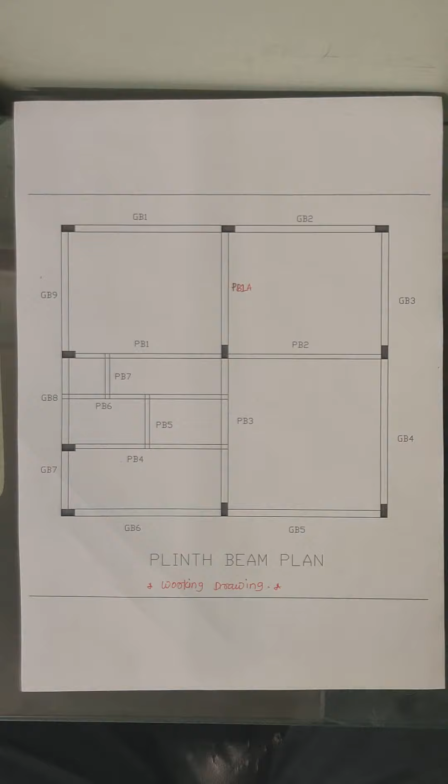In this video we are going to learn how to start or prepare the working drawing of plinth beam. In the previous video we have seen how to draw the foundation plan and centerline plan. First let us discuss the centerline plan that we prepared previously.

In this plan we prepared the center to center distance between columns by referring to one starting point called the face. All dimensions of the columns are given, their orientations are given. On this basis, the centerline plan is prepared.

After the centerline plan, it is necessary to know the different reinforcement details of the column. Sizes are known but reinforcement details are unknown, and excavation of the footing is also unknown. So before going to the plinth beam, it is necessary for all to know about the details of footing - footing size, footing depth, excavation depth, size of column, and reinforcement details of footing and column. All these important elements need to be known. Let us see them one by one.

If you see the load on column - first, column numbers 1, 2, 3 are all external columns having a load of one beam, two beams. So column numbers 1, 2, 3 are having the load of two beams, and the wall constructed over it also adds a load of slab.

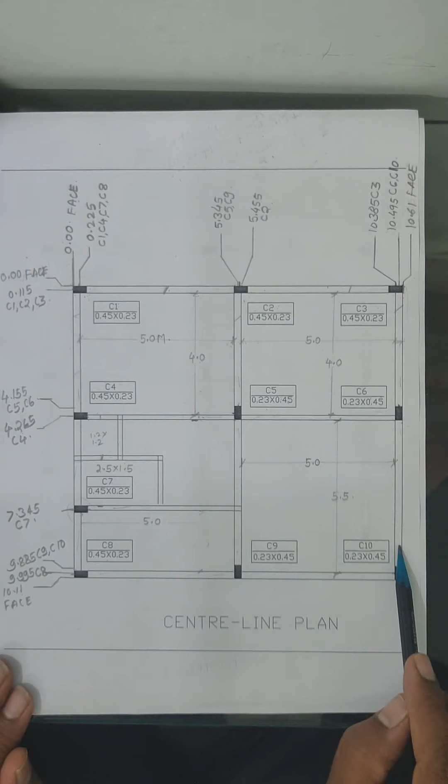Column number 7 is having regular load, or we can say it also has the load of three beams - beam 1, 2, 3. It is one of the bigger columns, having more load. Column number 8 has a load of two beams. Column number 9 has load of beams 1, 2 and 3. Column number 10 also has load of beam number 1, beam number 2, etc.

So we will split the columns into two parts - columns having less load, and columns having more load. According to the loading criteria, after applying all the design criteria, which you will study in detail...

...design of beams, RCC design. But at the second year level you should know only the different reinforcement details. How to design it is another part.

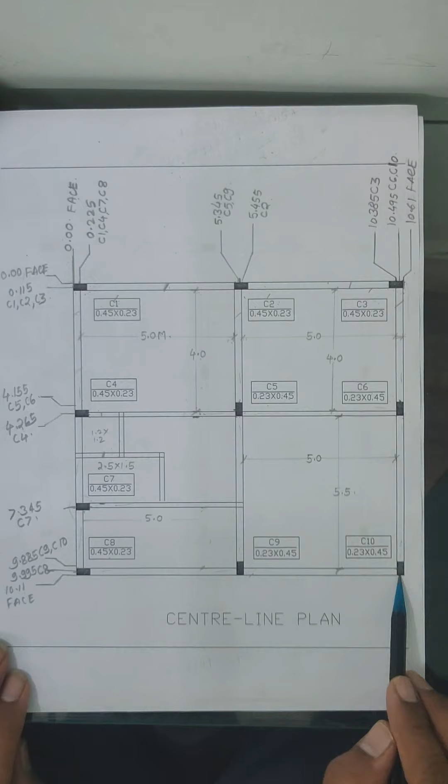In this video I will tell you how to give dimensions, how to give reinforcement details, and how to fix the number of bars. We will split the 10 columns into two parts: one group contains column numbers 1, 2, 3, 4 and 8. The second group contains columns 5, 6, 7, 9 and 10, since these have more load compared to the others.

Let us see the schedule. This type of schedule you have to prepare - you can call it the reinforcement schedule.

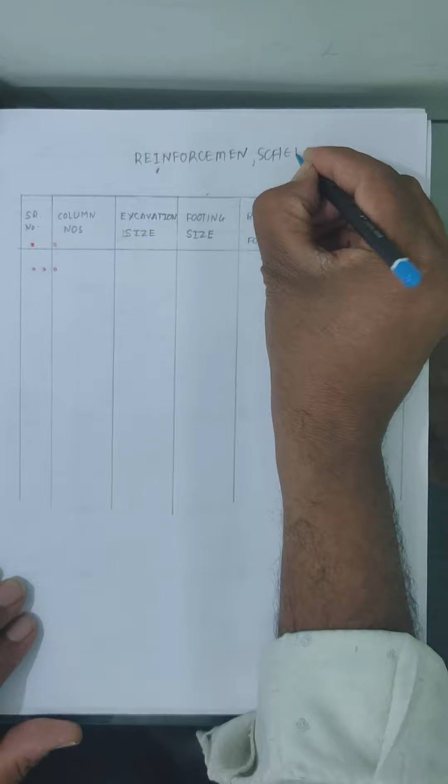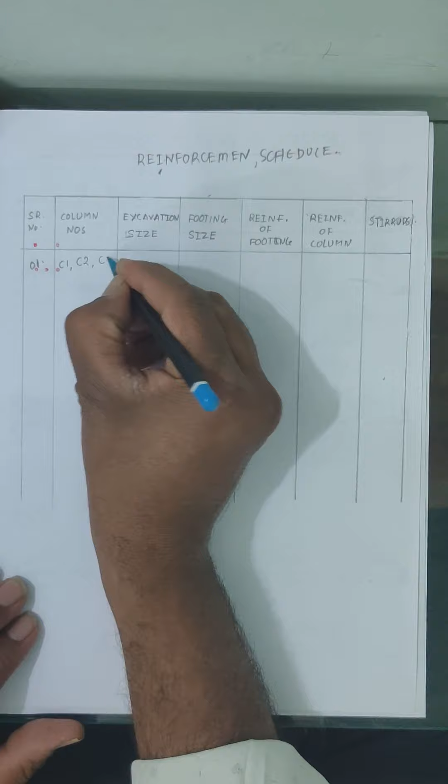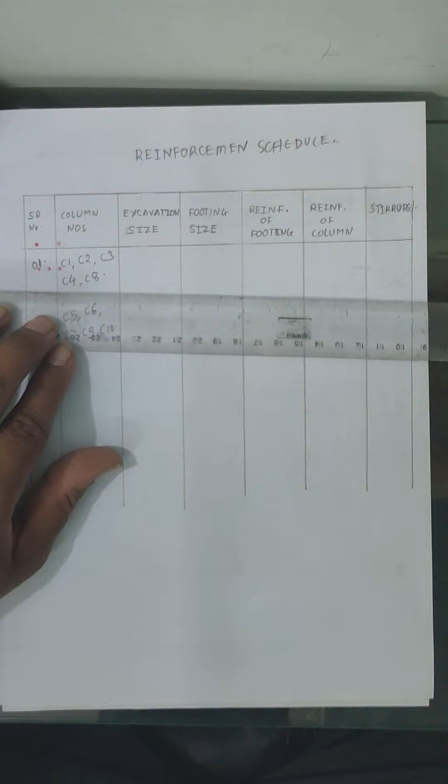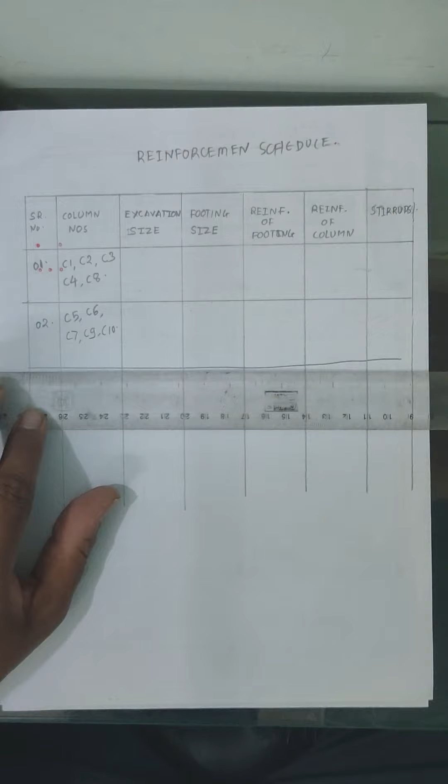Serial number 1 includes column number 1, column number 2, column number 3, column number 4, and column number 8 in one group. Serial number 2 includes column number 5, column number 6, column number 7, column number 9 and column number 10 in the second group. In this way the columns are split into two groups.

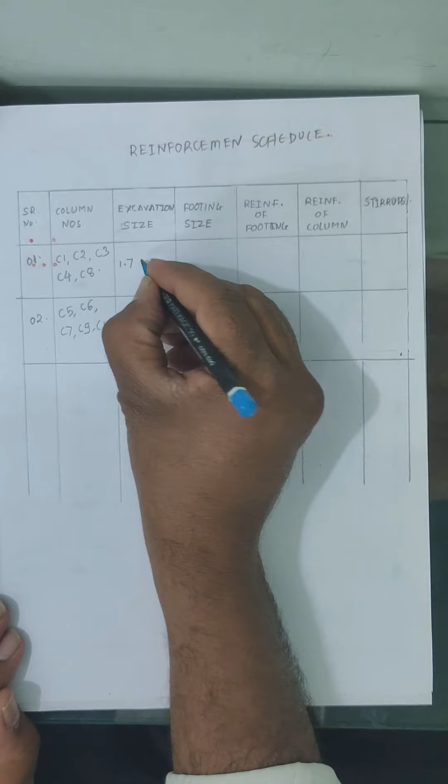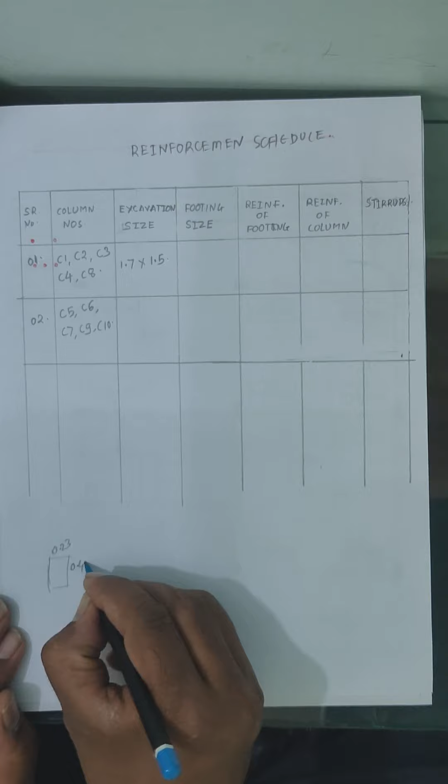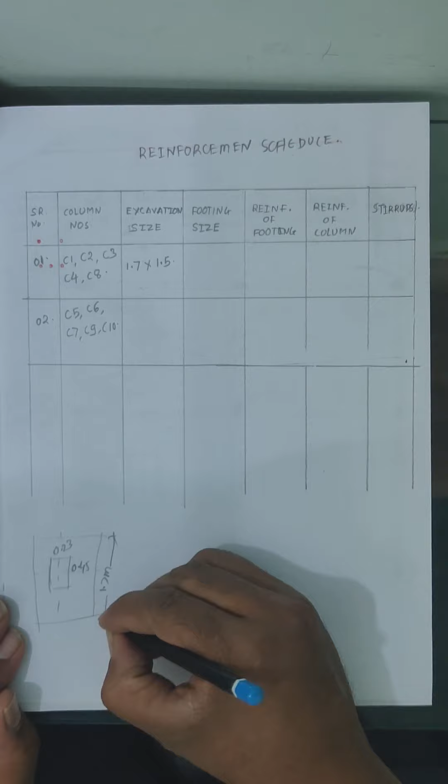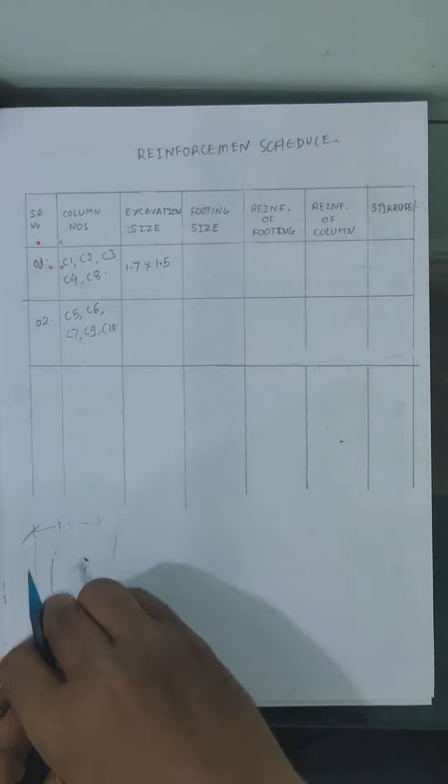First, the excavation size. The excavation size should be like this: 1.7 meter along its length and 1.5 meter along its width. If the size of the column is 0.23 by 0.45, then the excavation detail should be 1.7 meter along the length and 1.5 meter along the width. Likewise, you have to prepare the excavation size of the footing, or excavation trench, in which the footing will be cast.

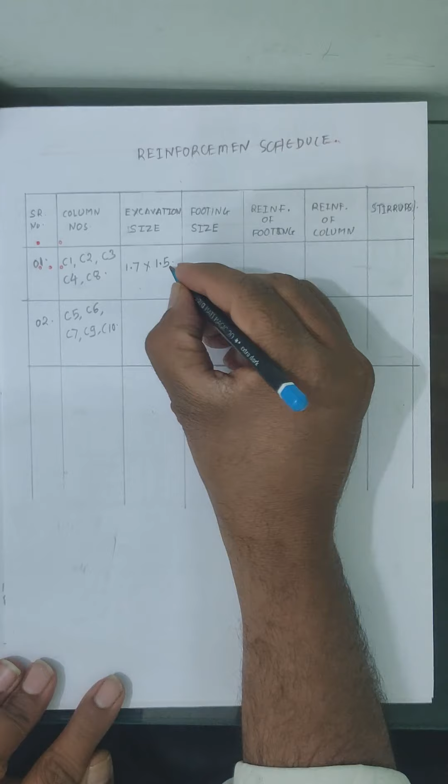Now the footing size should be less than the excavation size - 1.5 meter by 1.3 meter. Now let us look at the reinforcement of footing, the reinforcement detail.

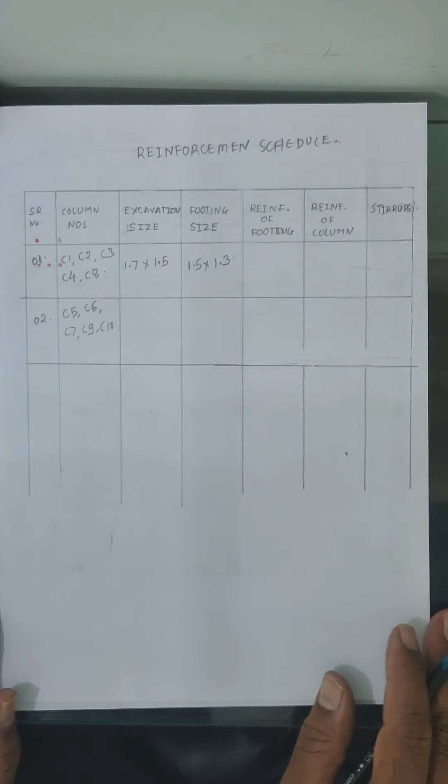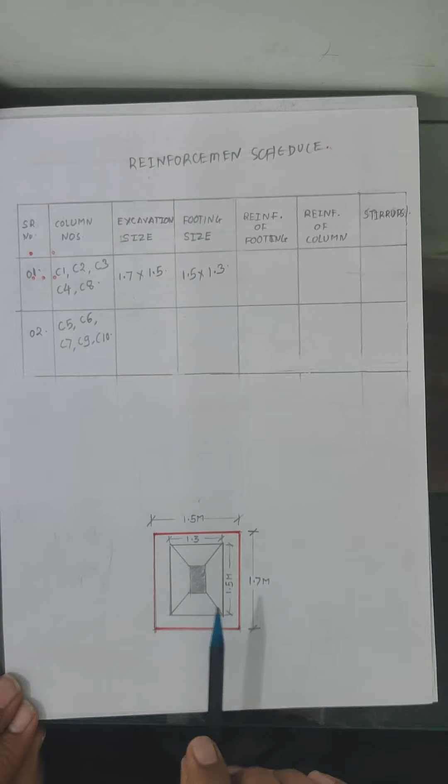With the help of this diagram you will understand how to draw excavation details and footing size. This red marked area is the excavation size of footing.

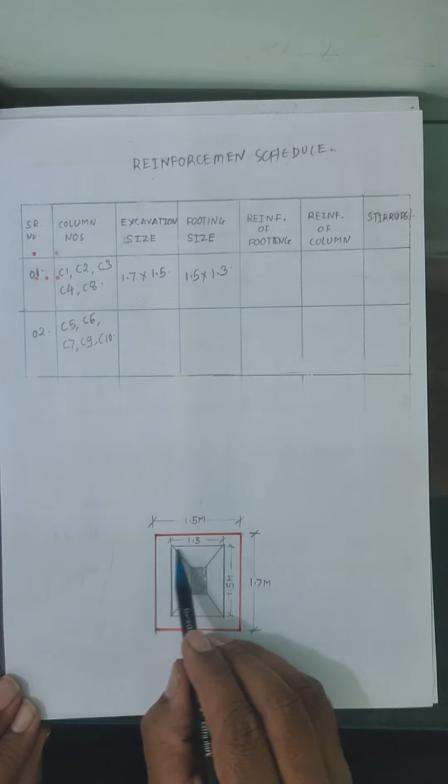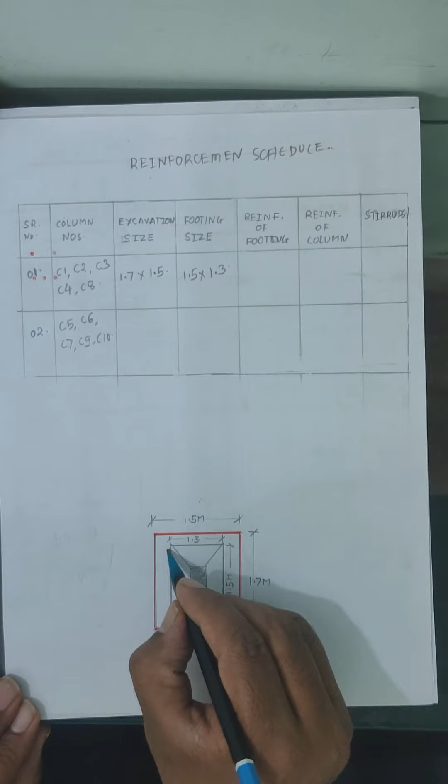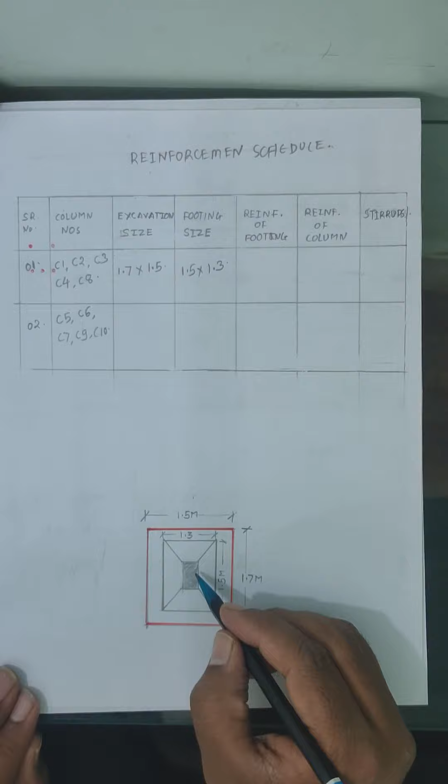For column numbers 1, 2, 3, 4 and 8, the excavation size is 1.7 meter along the length and 1.5 meter along the width. The footing size for this internal block is 1.5 meter along the length and 1.3 meter along the width, with 0.1 meter, that is 100 mm, as marginal distances necessary for reinforcement and formwork. So footing size is 1.5 meter by 1.3 meter.

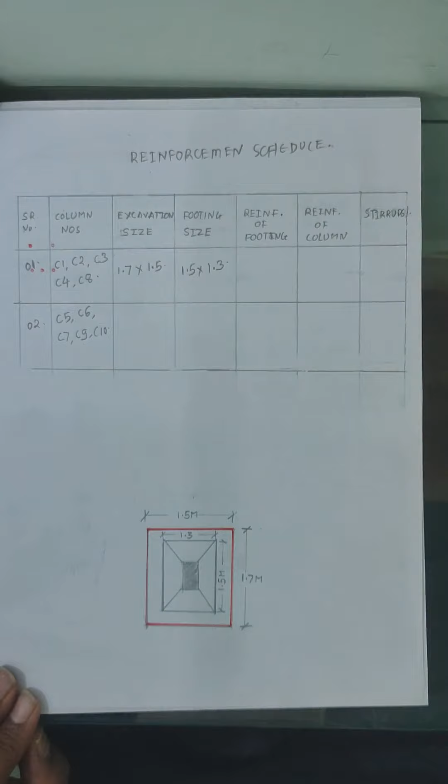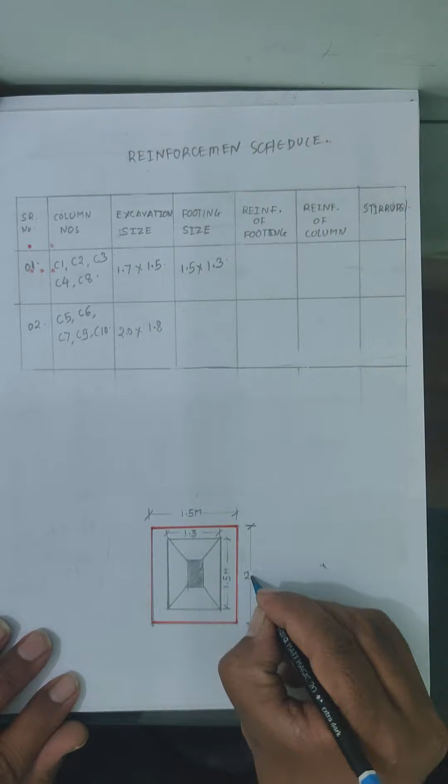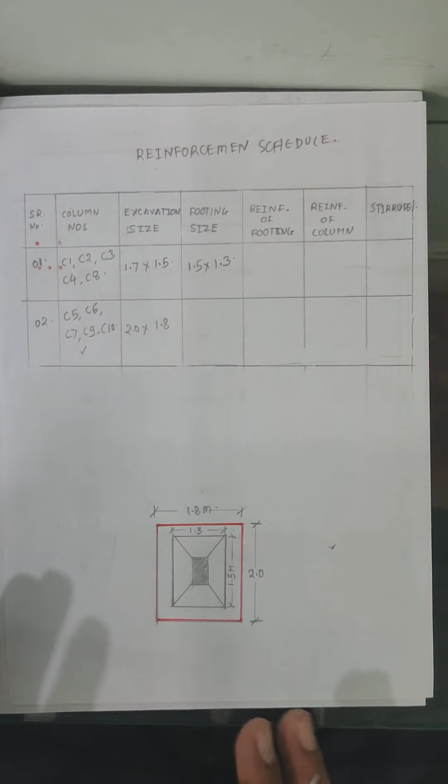For the second group, column numbers 5, 6, 7, 9 and 10, the excavation size is 2 meter by 1.8 meter. Along the length excavation size is changed to 2 meter, and along the width 1.8 meter, because this group has columns that are more loaded, therefore more area of footing should be provided.

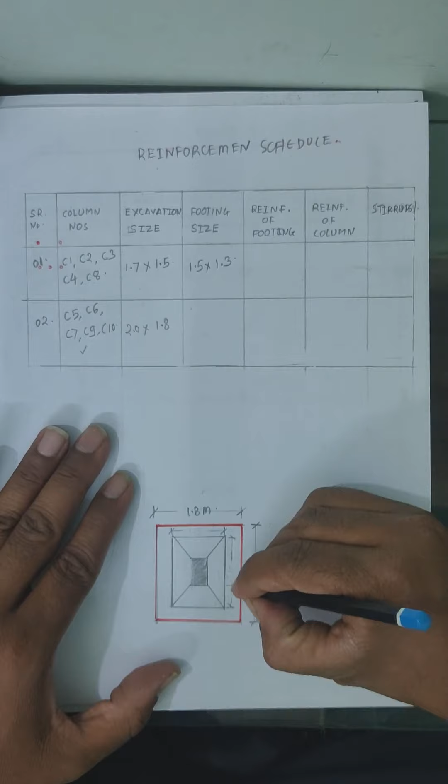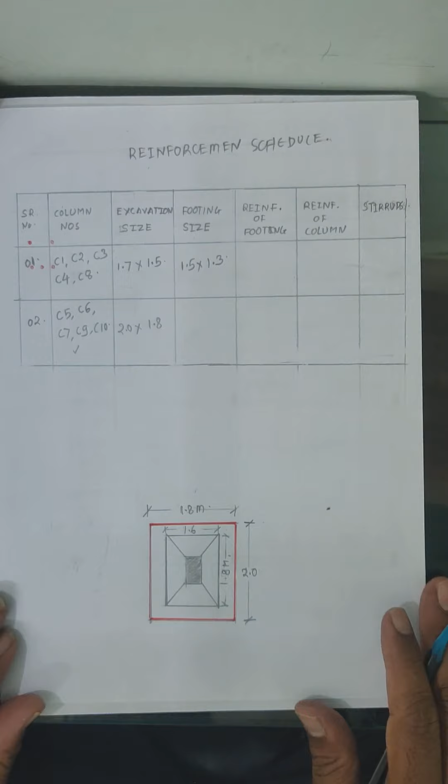So the footing size should be changed along the length and along the width. It should be 1.8 meter along the length and 1.6 meter along the width. So in this way, excavation size and footing size for the two groups of columns are given.

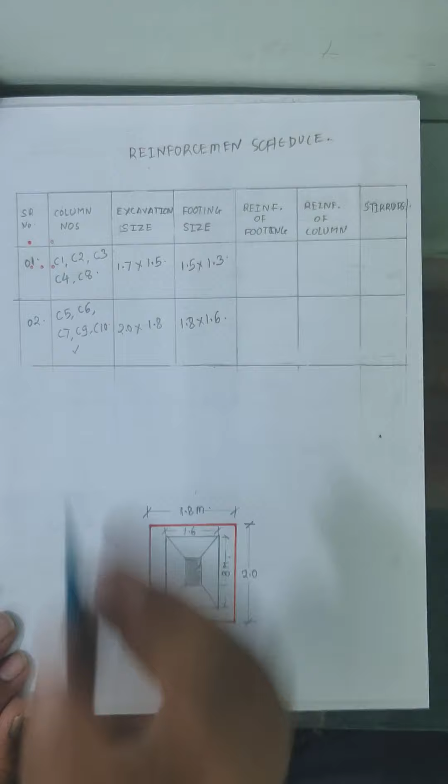Now reinforcement details of footing. How the reinforcement details are given, let us see. With the help of figure number 2 you will understand reinforcement details of footing and column. In figure number 2, reinforcement details of footing are mentioned.

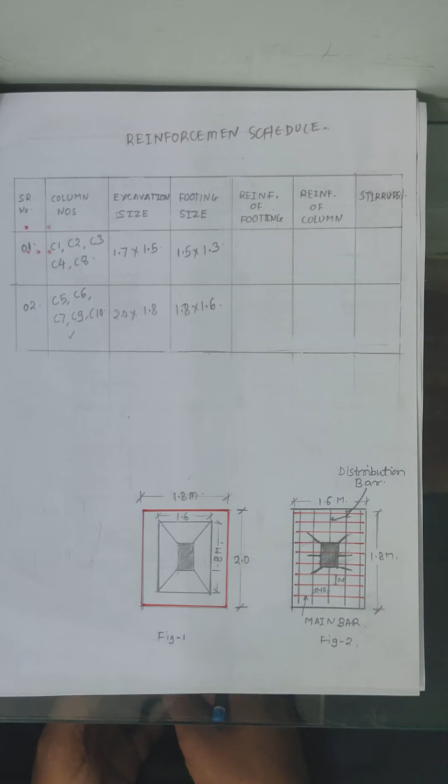We can see the bars in red color and bars in black color. Bars in red color are main bars along the width. Main bars are provided along the width, the short side, and for the long side, distribution bars are there. So main bar and distribution bar.

There is spacing mentioned between the main bars. The center to center distance between two main bars is 0.1 meter, that is 100 mm, and 150 mm distance between two distribution bars.

So main bars are provided along the width, that is the shorter span, and the bars provided along the length for the longer span are called distribution bars. The spacing between two distribution bars is 150 mm, that is 0.15 meter, and the distance between two main bars is 0.1 meter, that is 100 mm.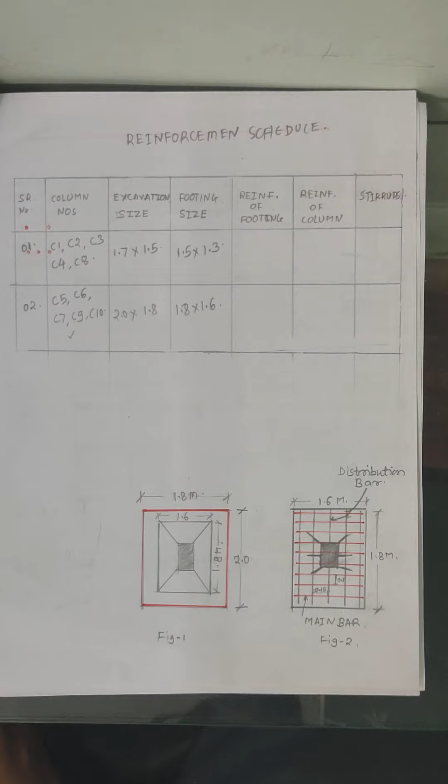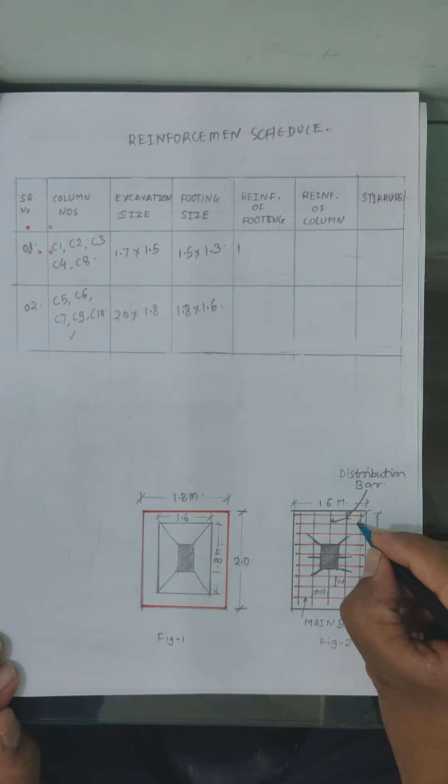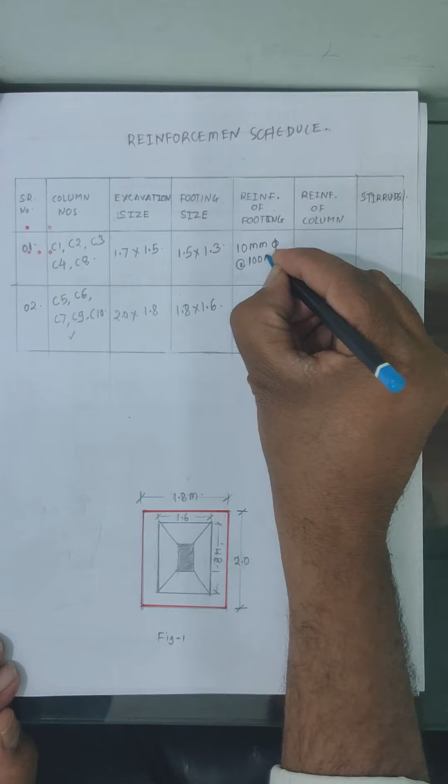So in this way the reinforcement of footing is mentioned. You can write down reinforcement of footing here: mainly 10 mm diameter bars are used for both the distribution bar and the main bar. So reinforcement of footing, 10 mm distribution bar and main bar are provided along the 100 mm center to center for main bar.

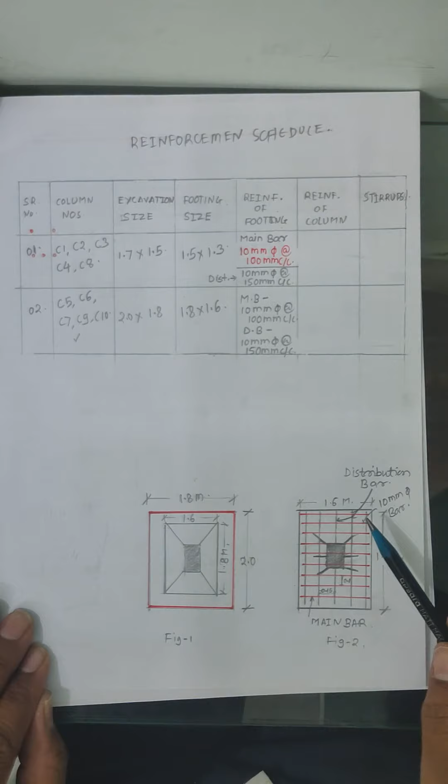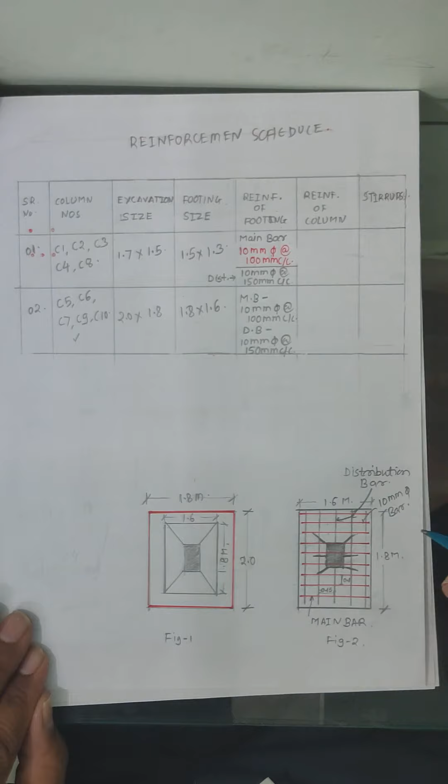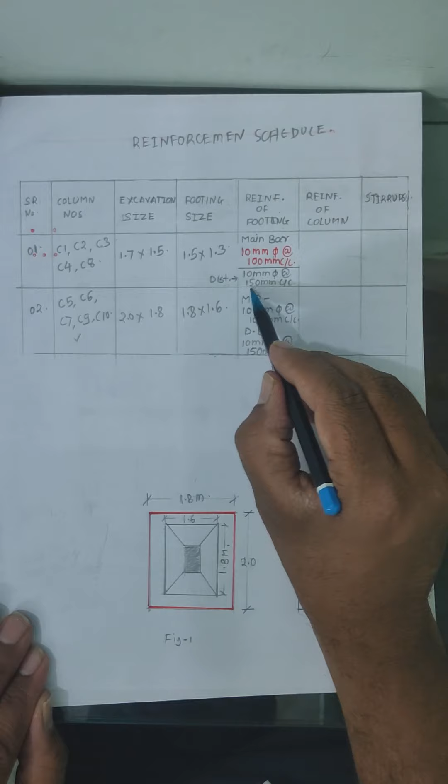So main bar is provided along the shorter span, 10 mm diameter at 100 mm center to center, that is the distance between two main bars is 100 mm. Distribution steel, shown in black color, 10 mm diameter bars, are provided at 150 mm center to center, that is the distance between two distribution bars is 150 mm. Same details are given to the second group also.

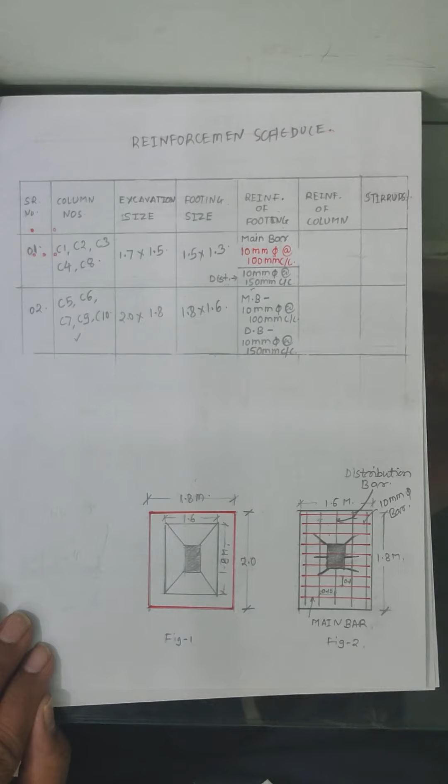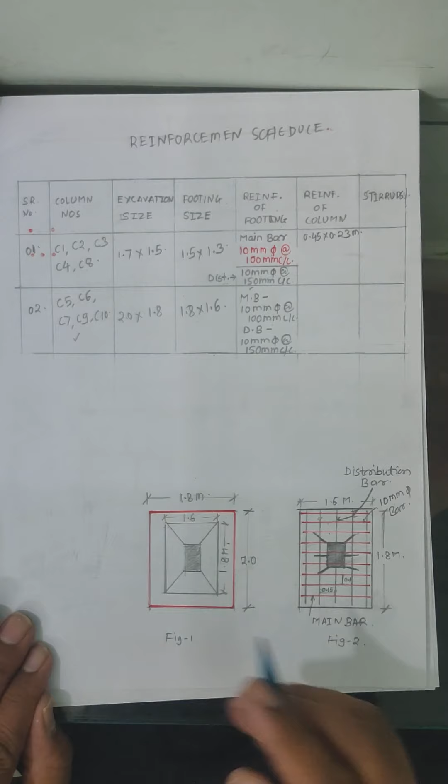Now the reinforcement of column. All of you know the size of all columns are the same, that is 0.45 by 0.23 meter. But there are two types of columns: one is lightly loaded and second is heavily loaded.

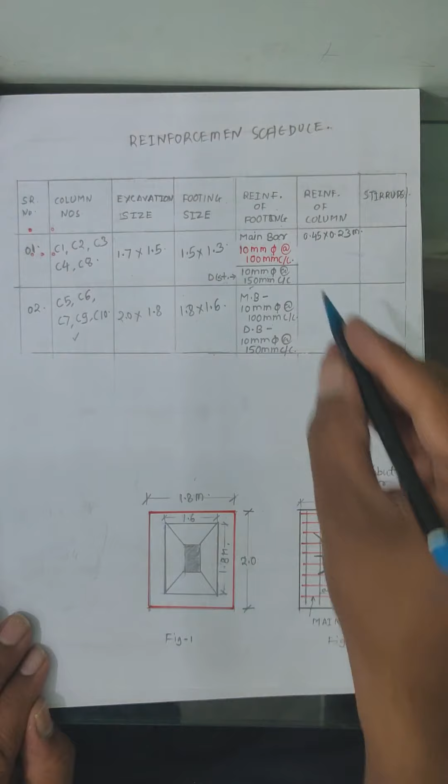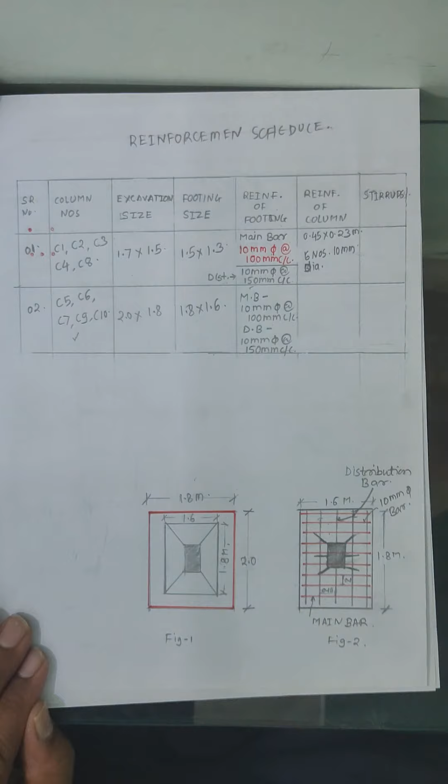For the lightly loaded column, reinforcement details are different. 6 numbers of 10 mm diameter bars are provided. And for the heavily loaded column, 8 numbers of 10 mm diameter bars are provided.

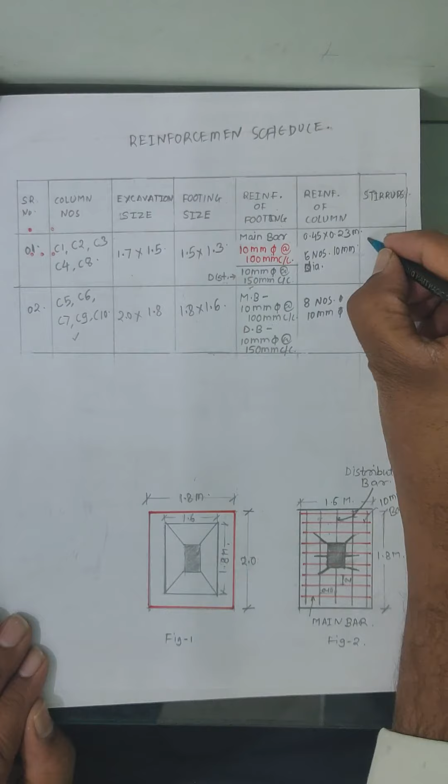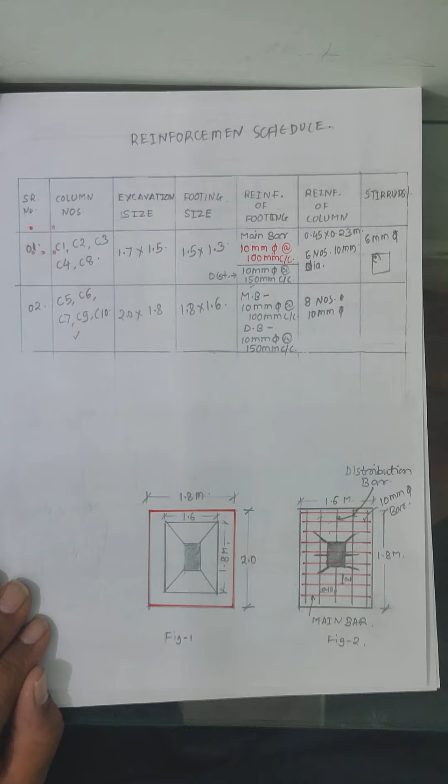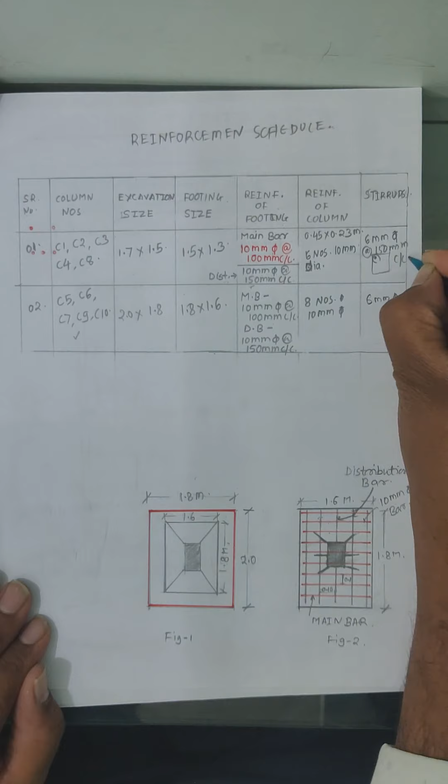For both groups, 6 mm diameter stirrups are used. All of you know a stirrup is generally used to bind the bars of a column. It should be in rectangular shape if the column is rectangular, like this. This is the stirrup, 6 mm diameter, provided at 150 mm center to center, that is the distance between two stirrups is 150 mm, that is 0.15 meter center to center.

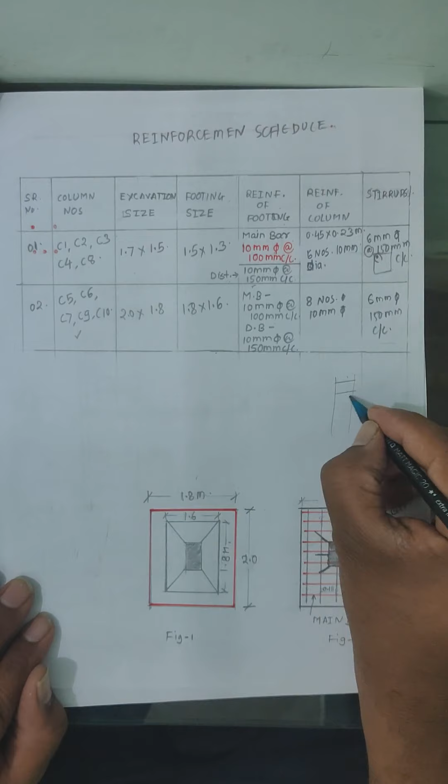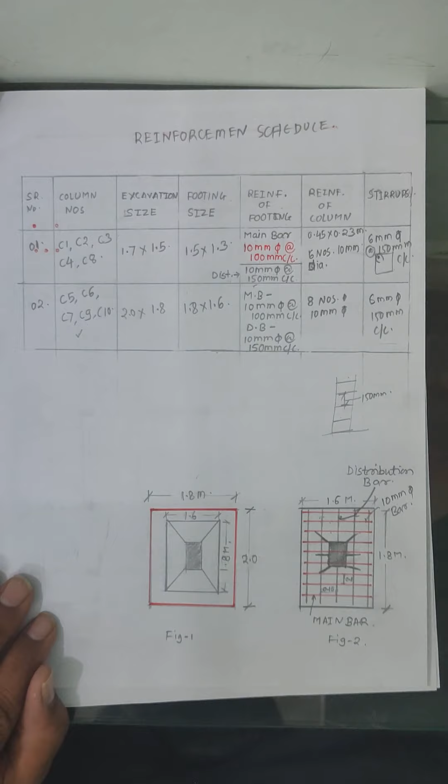For example, this is the column, this is the bar provided, and these are the stirrups provided. If you see the elevation of the column, the distance between two stirrups is 150 mm, like this. So in this way, reinforcement details of footing and columns are over.

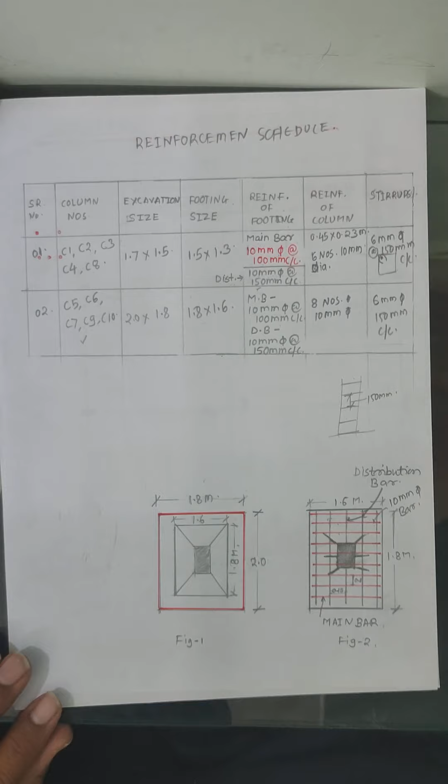Now secondly we will see how to draw the plinth beam drawing. First of all, take a review. Previously we have calculated all the details of center to center distance between columns, orientation of columns is given, their sizes are fixed, and accordingly we have prepared this reinforcement schedule.

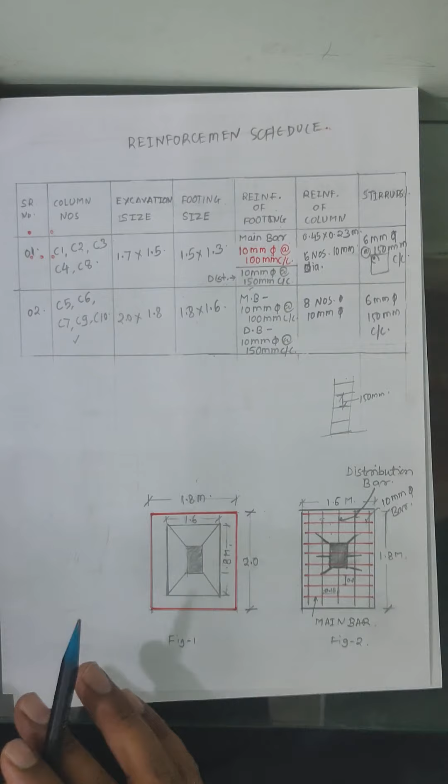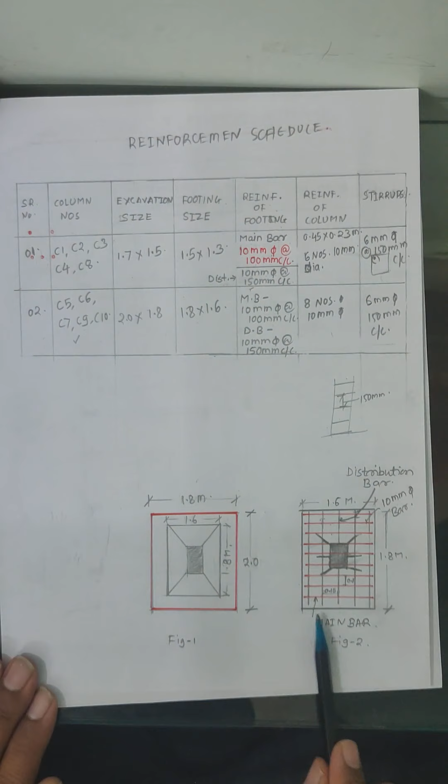All 10 columns are split into two groups, heavily loaded column and lightly loaded column. Serial number 1 is lightly loaded column and serial number 2 is heavily loaded column. Excavation size and footing size are mentioned in figure number 1, and reinforcement details of footing and column along with stirrups are mentioned in figure number 2. I hope you understood all these details.